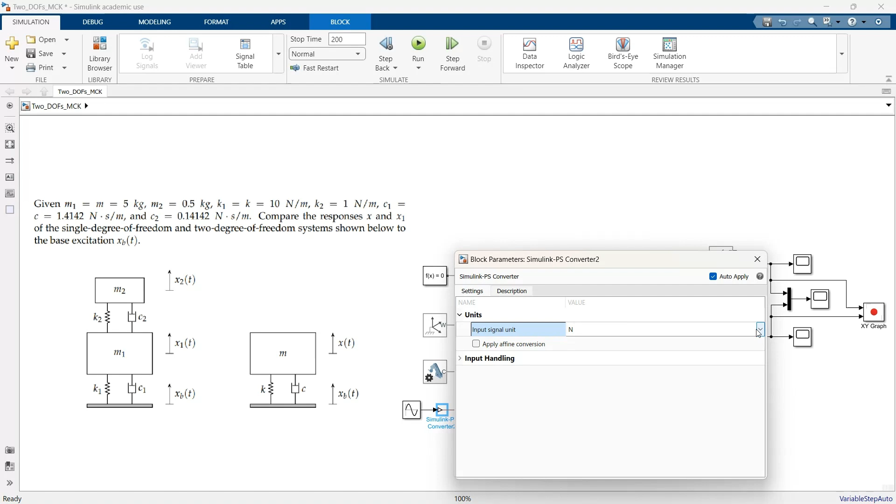First, I'll replace this transform block with a prismatic joint. To make it move freely, I'll set the stiffness to 0 and then change the actuation method to motion. Let's add a harmonic input. Adjust the unit in the converter and select second order filtering. Okay, for the input, I'll use 0.2 meters amplitude at 0.5 radians per second. And I'll make sure to turn off the external force.

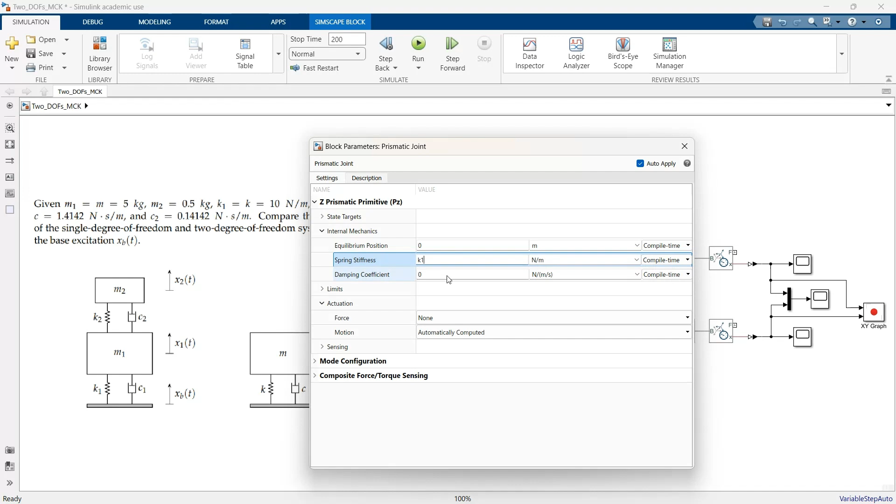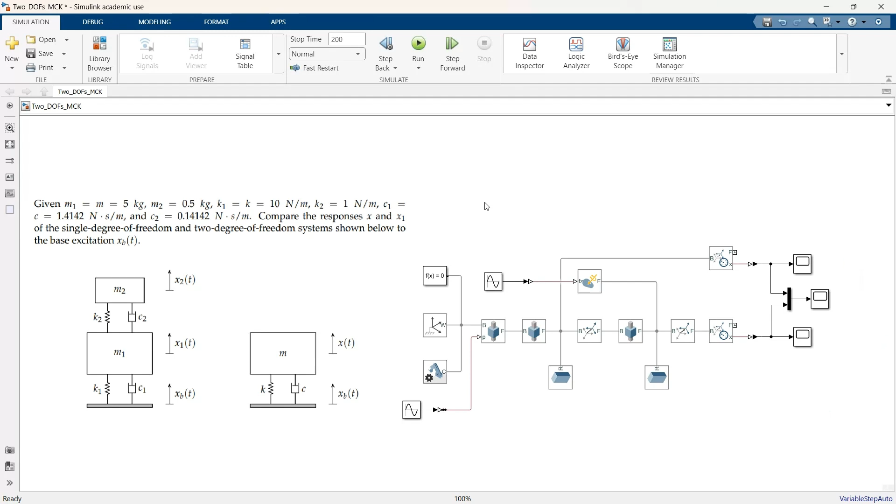Now, I'll change the parameters. I've already defined all the variables, so I can quickly assign them here. Using variables like this makes the setup much cleaner and easier to adjust later on. I'll wrap this system into a subsystem. Let me organize it. And change the sensing coordinate to the Z direction.

Alright, this one is a tuned mass system. Now, I'll add the original system to the model. Its parameters are the same as the primary mass in the tuned mass damper system, so I'll just copy and paste it. Add sensor here and a scope. I'll use this multiplexer to compare the results.

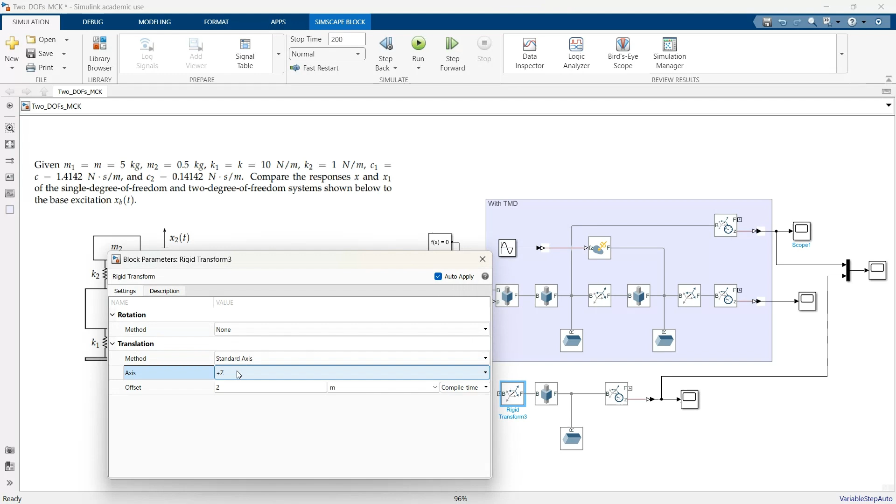And translate it along the Z direction to avoid overlapping. I'll also wrap this up to avoid confusion. We should connect the reference here. Also, I'll turn off gravity to focus on vibration effects only. Alright, let's see the results.

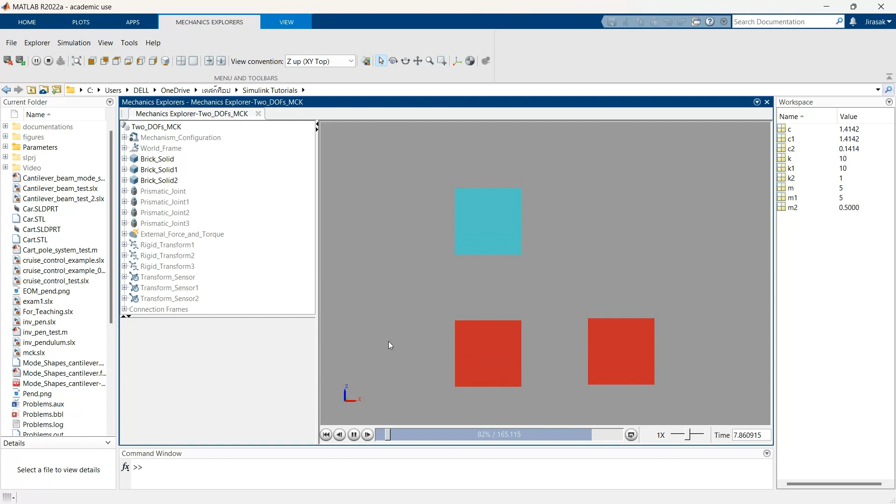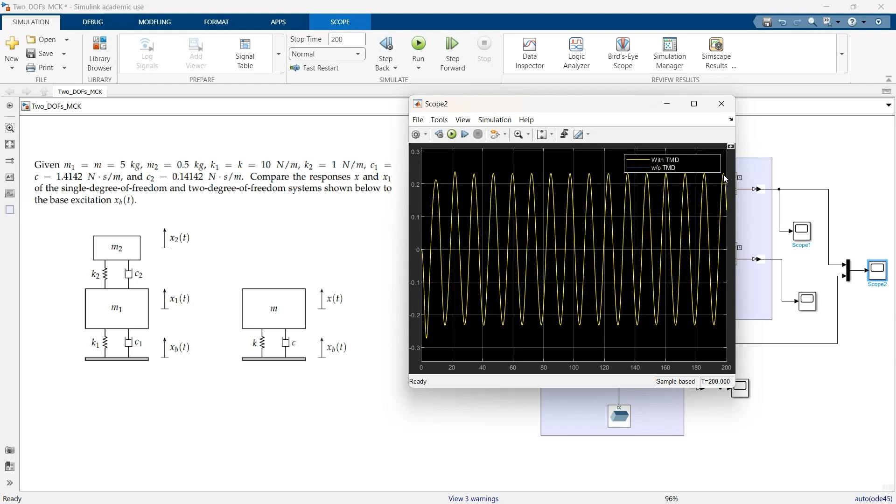From the graphical plot, this one is the system without a tuned mass damper. I think this plot might be hard to interpret clearly, so let's look at the time responses instead. As you can see, both systems behave quite similarly. That's because a tuned mass damper works by being tuned to absorb vibrations at a specific frequency, typically the natural frequency of the primary system. The absorber's natural frequencies were set near the original system's resonance.

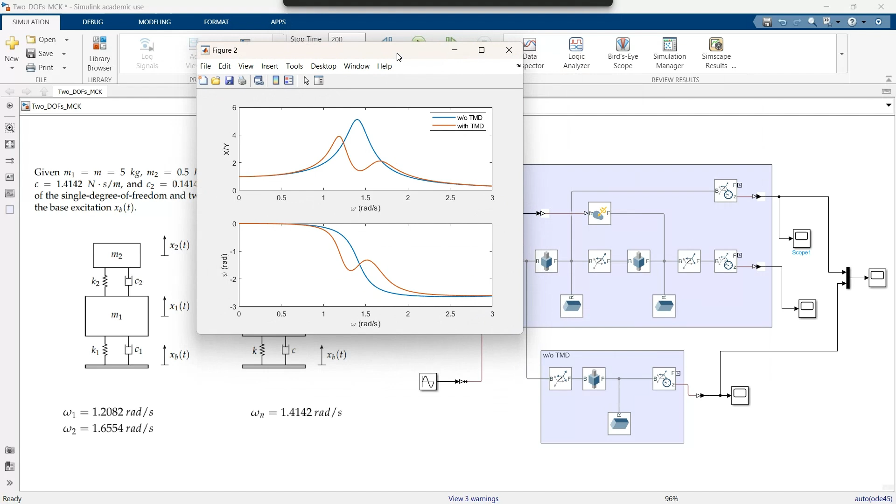Let's take a look at the frequency responses. You'll see that the system with a tuned mass has a lower peak, especially at the natural frequency of the primary system. So let's set the excitation to that frequency and see what happens. Here we go.

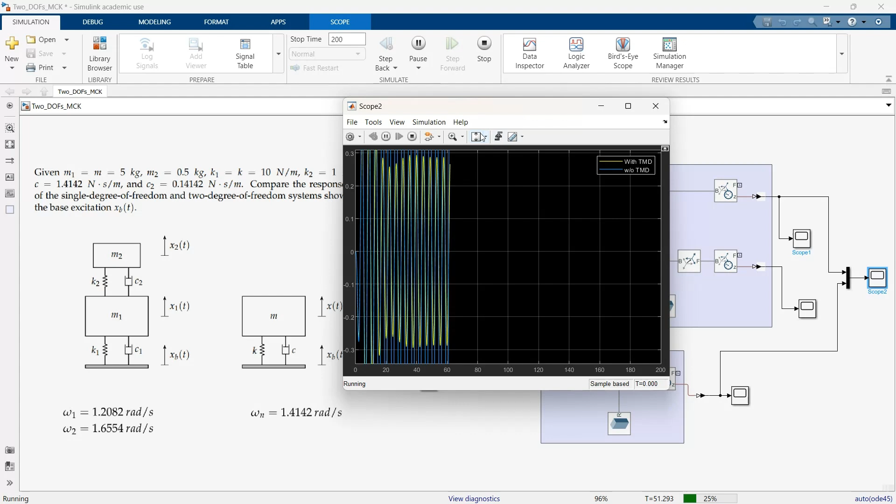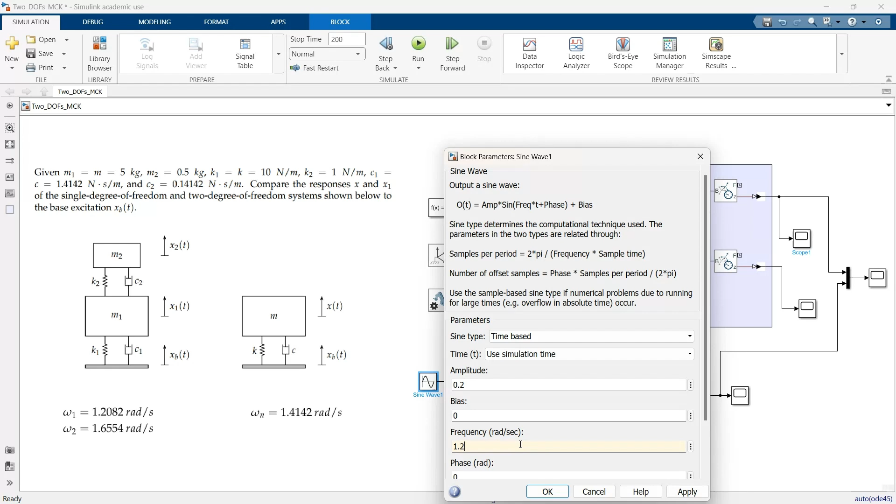As you can see, the system with the absorber shows a much lower amplitude, just like we observed from the frequency responses. Now let's try this frequency. At this point, the system with the absorber has a slightly higher amplitude. Here it is.

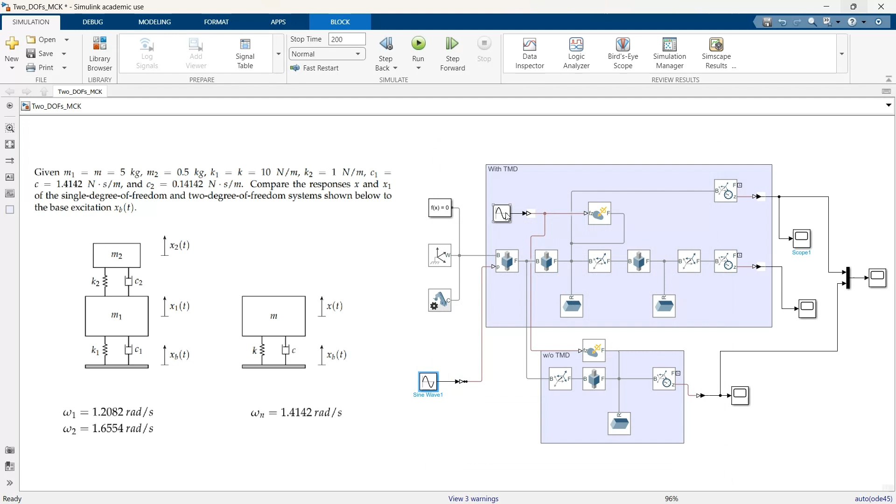Alright, let's see what happens if we apply a force directly to the primary mass instead of using base excitation. I'll move the force block to the primary mass. And this one, alright, I'm going to go with 1 Newton. And then fix the base. Let's see.

You'll see that the tuned mass damper still works. It's effective as long as the excitation acts along the designed direction, whether it's base excitation or a direct force.